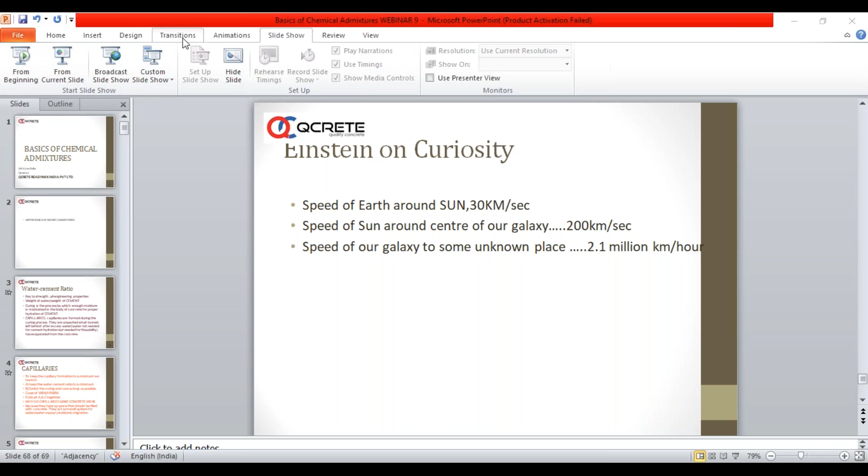Before we start talking about chemical admixtures, we need to know some basics which are very important for any concrete technologist or QA/QC engineer who receives or produces concrete. One of the most important points to remember always in QA/QC of concrete is the importance of water cement ratio. We know that water cement ratio is key to strength and all engineering properties, and the strength of concrete is inversely proportional to water cement ratio, while permeability is directly proportional to water cement ratio.

Most importantly, we need to know that we put extra water, even though we require about 0.27 or 0.22 for cement to undergo hydration. We put about 0.4, 0.35, whatever it is, based on our convenience. This is called water of convenience, and this water goes on evaporating at all temperatures above 4 degrees, and at higher temperatures and higher wind velocity with lesser humidity, the evaporation is greater.

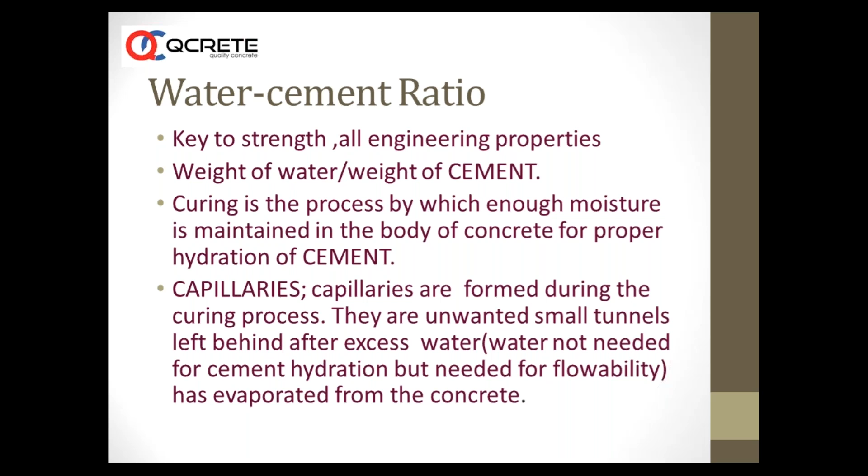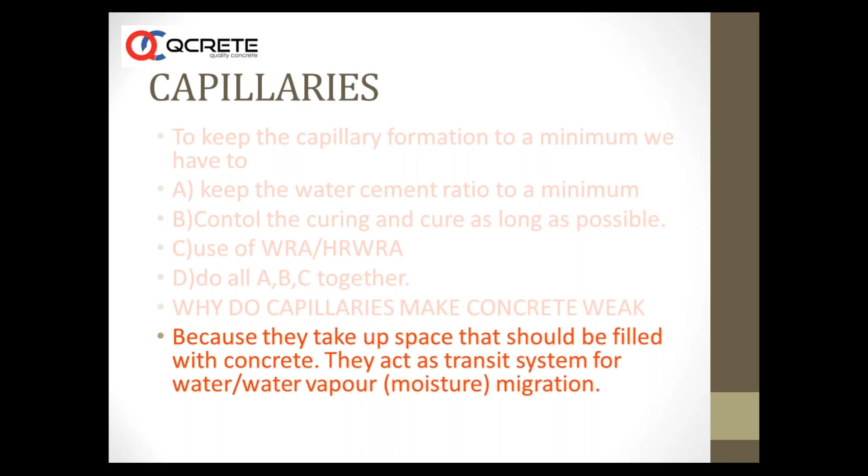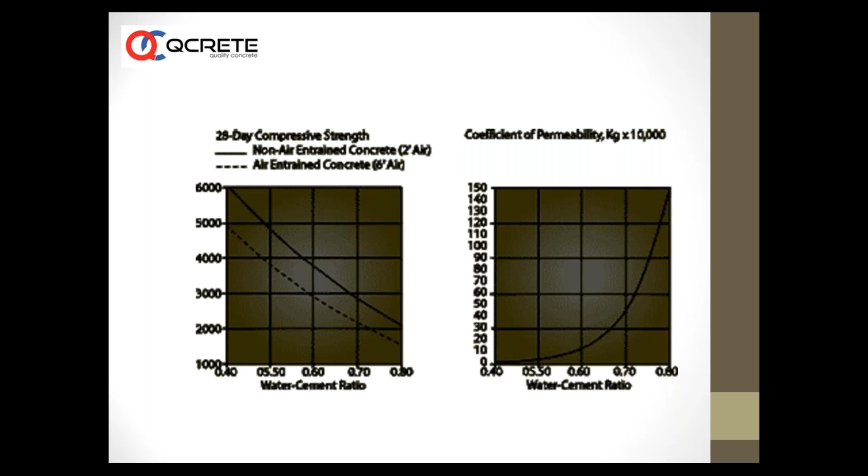Now, can we reduce the water cement ratio directly because we need some optimum cement content? We can reduce the water cement ratio quickly and directly, but it will affect the workability, and you can end up making some low slump concrete or zero slump concrete, or concretes which are useful for paver blocks or concrete blocks or some precast elements, and you cannot produce and transport the concrete, and you cannot have a better shelf life where you can use the concrete for 3 hours, 4 hours, something like that. So there emerges the admixture.

The other point which we need to remember is why we should use optimum cement content. We have already discussed that water cement ratio is the governing factor for strength and durability, and with lower water cement ratios we can get required strengths suitable for our construction, whether it is M20, 25 or M30 or whatever it is. So we can go for reduced cement content mixes with good or reduced water cement ratios to give the required strength.

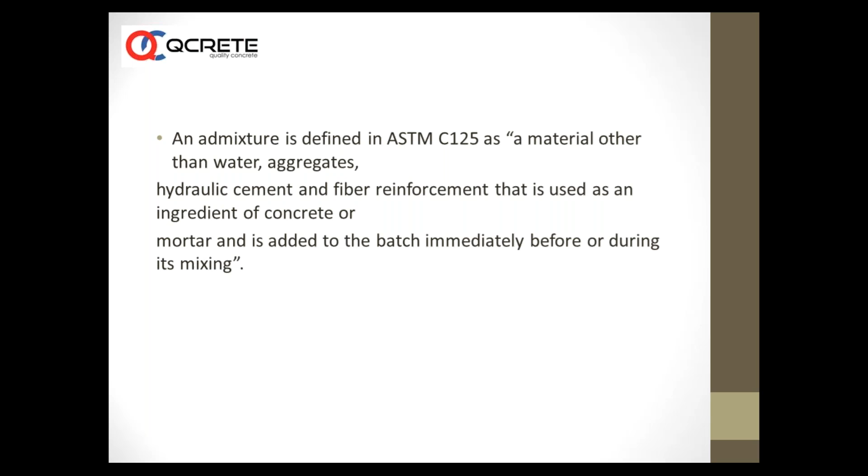There are other definitions also, where we say admixtures can be added up to about 5% by weight of cement in the mix, and that they are other than materials like fly ash, GGBS, microsilica, metakaolin, rice husk ash, and fibers, which do not fall in this category of chemical admixtures.

One of the differences we can talk about with chemical admixtures is that they function in a totally different way compared to mineral admixtures. Mineral admixtures totally change the hydration products, the way hydration happens inside the body of concrete - the hydration products are different when mineral admixtures are used. But chemical admixtures function at the surface level as charge inducers, dispersants, accelerators, or decelerators of the hydration process, and they seldom participate in the actual hydration process.

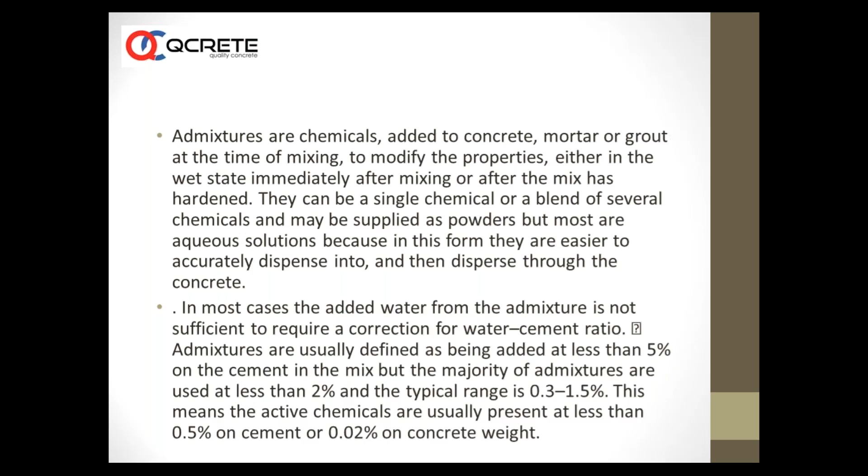Admixtures, including water reducing admixtures, have to completely comply with requirements of slump, water reduction, setting times, compressive strengths, etc., which are specified in IS code 9103. ASTM C494 is also very popular. So in the Indian code, we have some specifications, and the admixture manufacturer has to completely comply with these codes.

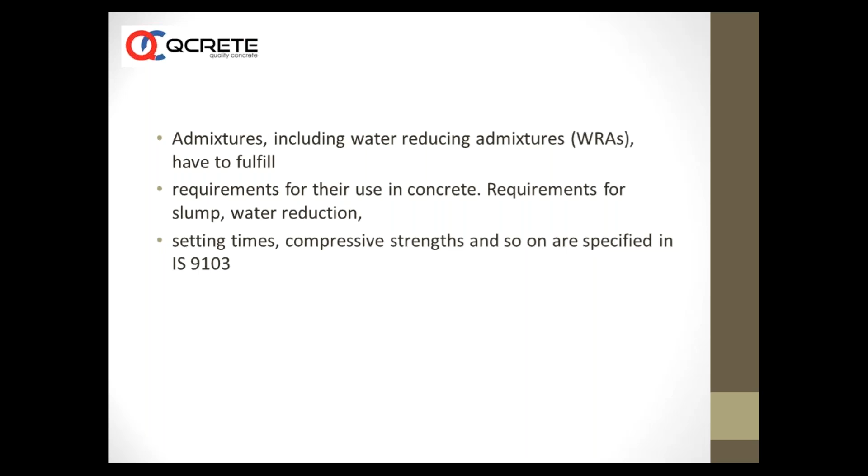Plasticizers and superplasticizers belong to a group of chemical compounds known as dispersants, and their primary function is to reduce water, increase workability, reduce cement, increase strength, and improve durability.

For a producer who is producing the concrete, he can have an optimized mix design. For a contractor who places and finishes the concrete, he will get appropriate workability, compactability, cohesion, proper setting time, and strength development.

A designer also benefits with these materials, getting concrete that will meet special needs for placing and performance. An owner or client gets the design requirements intended for prolonging the service life of the structure, and for everyone in the construction community and humanity, admixtures contribute in terms of sustainable concretes. So admixtures are part and parcel of sustainable concretes.

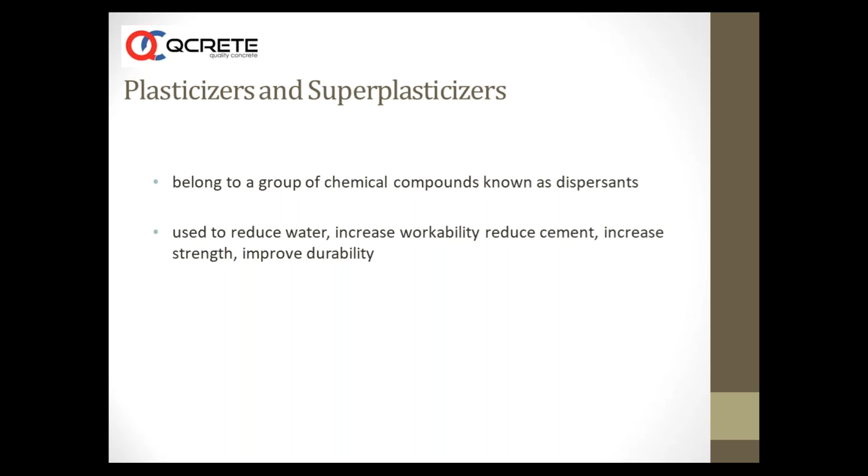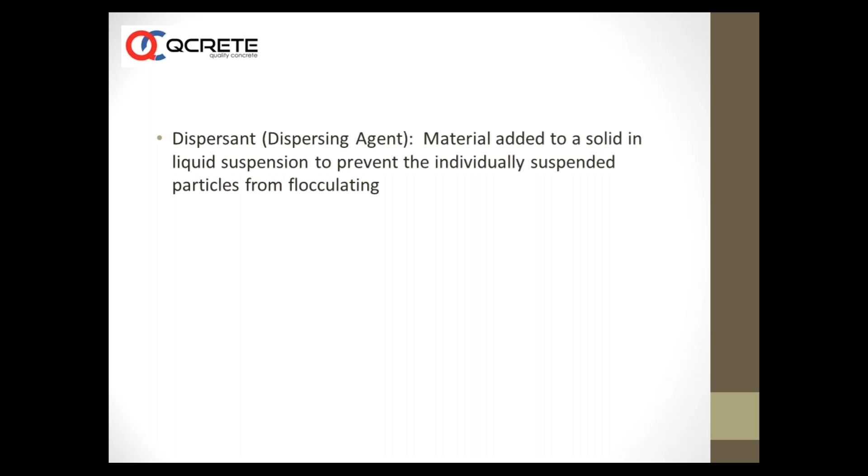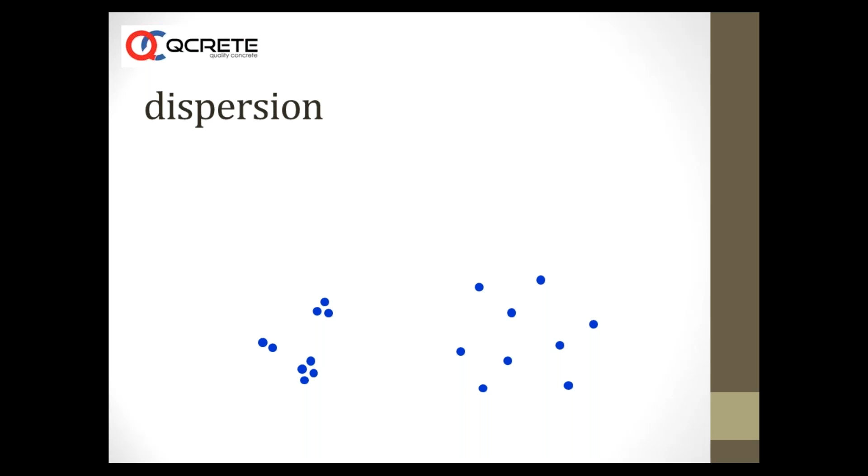So how do they act? Admixtures generally act like dispersants. They do not allow flocculation. For example, what happens when cement particles are there? You add some amount of water. Cement has a tendency to flocculate. The particles come together and they trap water. And this water, which is trapped or entrapped between the cement particles, cannot express itself in terms of giving good workability to the concrete.

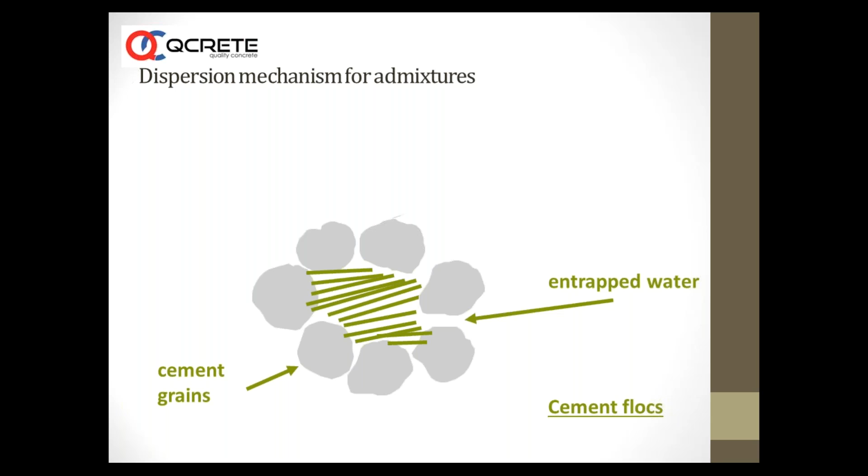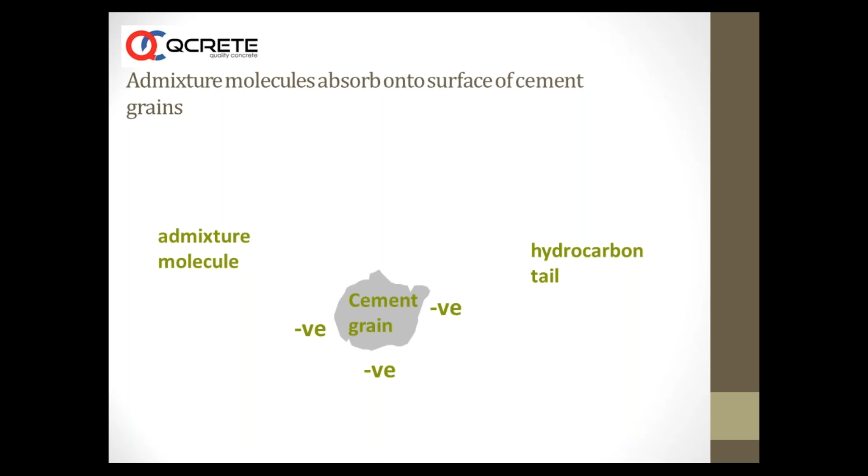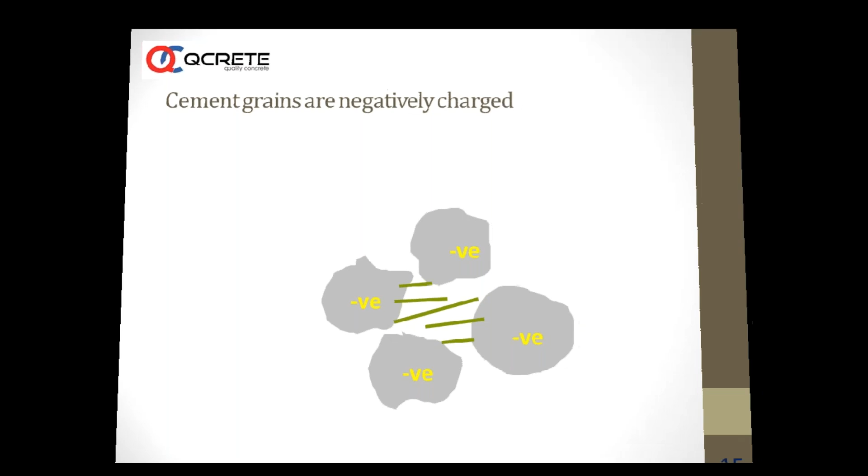This is a basic characteristic of cement actually. It traps the water when you add some amount of water, and hence you will not get the total amount of water already added to express itself as a fluid material. When you add a chemical admixture, it induces and deposits negative charges on the cement particle surface, and when several of these charges are deposited on the cement particles, they become negatively charged with unidirectional alignment. Since the charges are the same, the particles move away from each other, and the water which was erstwhile trapped in the absence of admixture is released.

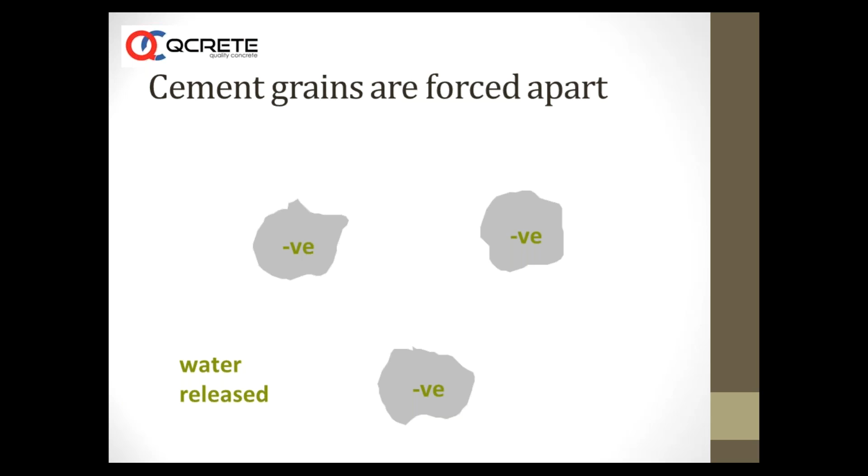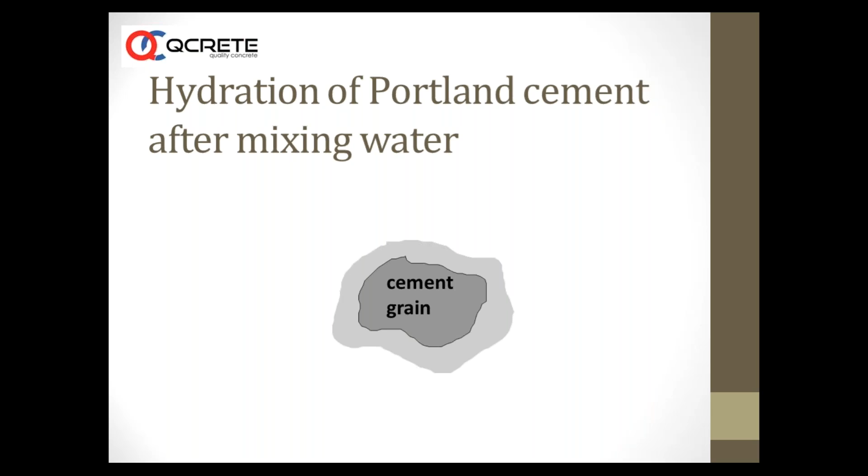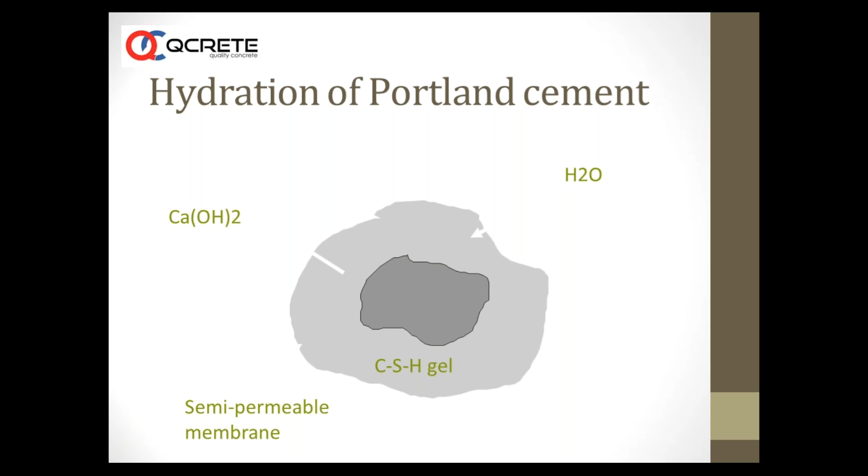So what happens when we add chemical admixture and water? When you add water, cement grain undergoes reaction with water and produces CSH gel and calcium hydroxide, as we discussed earlier. As time passes, the hydration products grow, and because of both physical and chemical action, the charges become weaker and weaker. When the cement particles move over one another during transportation or placing, the charges lose their energy and power, and the cement particles start coming together closer to each other, and normal hydration starts.

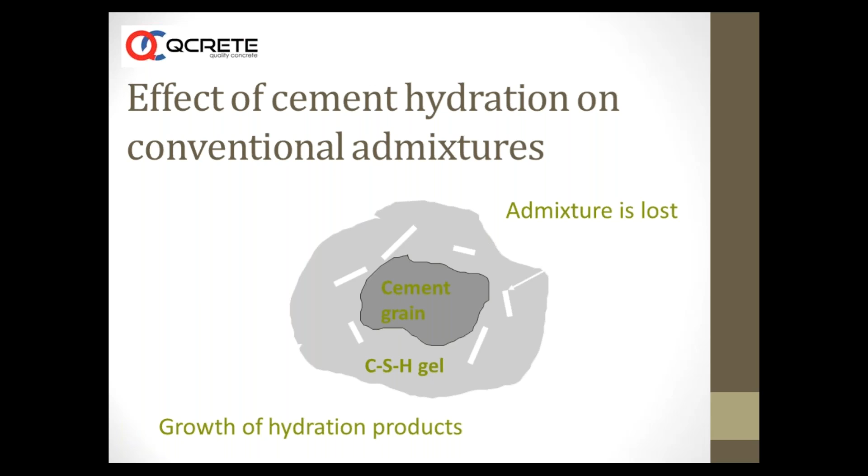There will always be a tug of war going on between one set of forces trying to set the concrete with the aid of C3A, while the other set of charges deposited by superplasticizer or plasticizer are trying to move the cement particles away from each other. So as time lapses, the cement particles start coming closer to each other, and the hydration starts as normal as it should have been in the absence of chemical admixtures.

So chemical admixtures are not new, they have been there for quite a long time. Earlier, we always remember what the Romans were doing, because in whatever way we see, the historians have not been able to go beyond what the Romans were doing. Even concrete technologists or scientists are not able to record or document what was happening much before the Romans. Even though we have structures beyond 5,000 or 10,000 years old, like the pyramids, we have not recorded or documented usage of mortars beyond that period. So Romans come first. Romans were using blood, straw, and urine in the mortars, along with volcanic ash, to make strong mortar.

In early 1935, plasticizers like lignin-based and naphthalene formaldehyde-based superplasticizers came into existence with limited water reduction. Around the same time, one of the first patents was done on SNF, sulfonated naphthalene formaldehyde-based admixture. The next step was in 1945, where air entraining admixtures came into being. That is said to be one of the biggest changes in the history of concrete, which boosted concrete practices significantly and changed concrete practices forever.

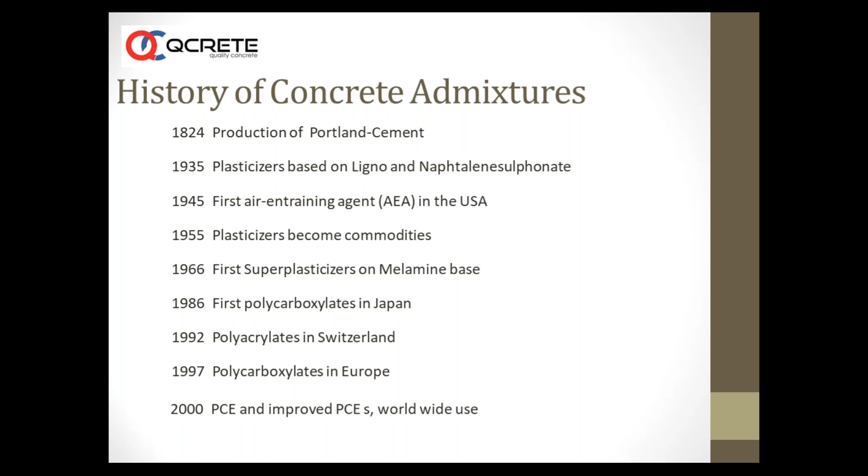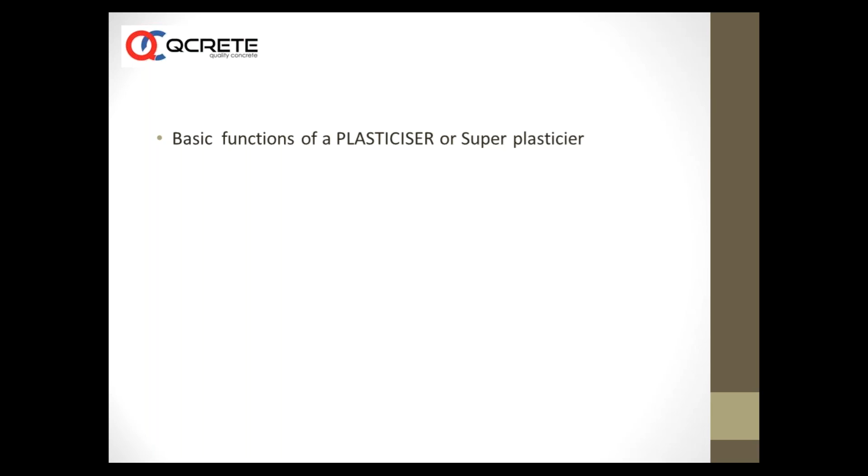We need to know what are the basic functions of a plasticizer before we move on to the benefits and things like that.

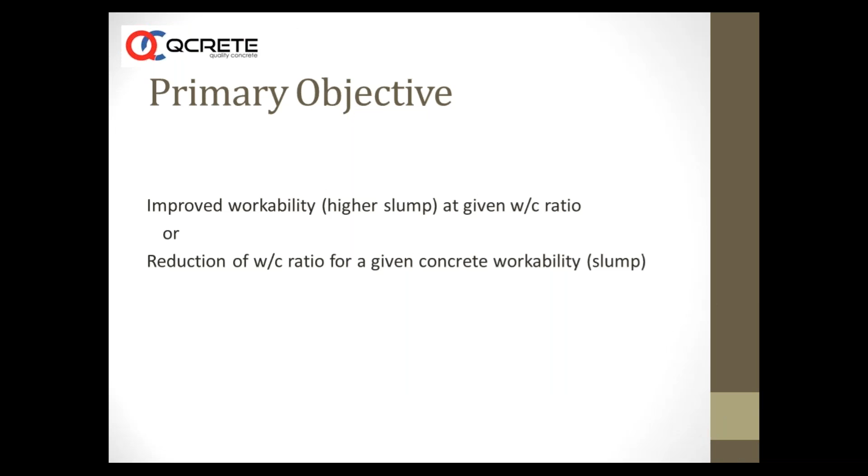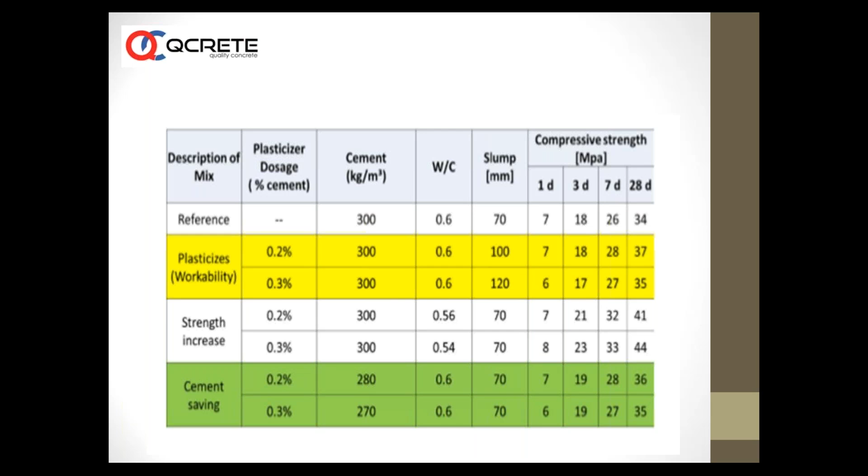So in short, let's say the workability is A, strength is B for a mix. If you are adding admixture and reducing the water, you will get similar workability and increased strength.

Second case: the admixture is added, we reduce the water, and we can reduce some amount of cement. Then you can get workability similar to the reference concrete, and the strength can be similar. This is where you get the cement savings.

Third is where you just add the admixture. Here you want a flowable, fluid concrete. You are not bothered about economy or increasing strength, just making the concrete flow better, fill your molds faster and quicker. So here you get increased workability and similar strength.

So the entire use of chemical admixtures, which any concrete producer nowadays is using, is based on these three principles: either we can increase the strength, or we can save the cement, or we can increase workability, or we can do combinations of these things.

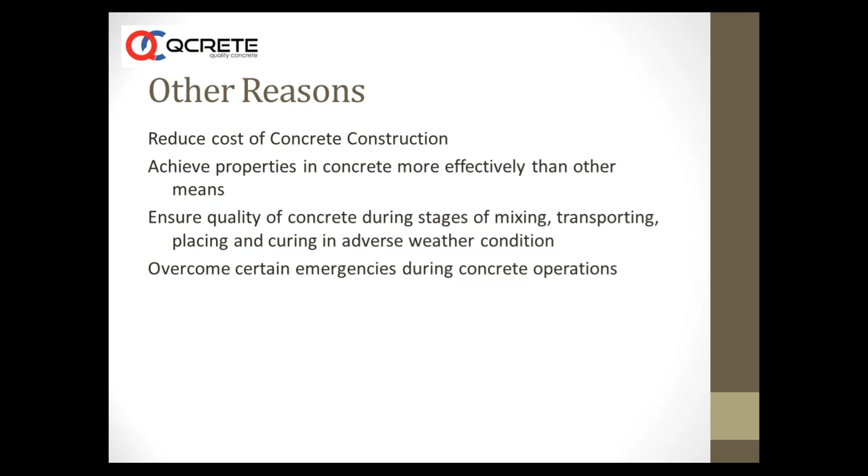Other reasons: reduce cost of construction, achieve properties in concrete more effectively, ensure quality of concrete during stages of mixing, transporting, placing, during adverse weather conditions, and overcome certain emergencies during concrete operations. These are some of the other reasons why we have to use chemical admixtures.

A description of different kinds of admixtures is given in ASTM C-494. Type A is water reducing admixture, which is a simple plasticizer. A plasticizer which gives a water reduction of about 5 to 12% with a dosage of about 0.3 to 0.8%.

So here the main function is that the chemical admixture will reduce some amount of water, and it can be used, as we told earlier, to either increase the fluidity, increase the strength, or do some cement saving. This is just a water reducing admixture. It will not have any other properties.

The next category is retarding admixture. A retarding admixture is a pure retarder which affects the setting time of concrete. It prolongs the setting time of concrete, and allows the concrete to be transported and placed for a longer time.

But type B admixture doesn't have water reducing ability. It doesn't reduce the water content in the mix.

Similarly, the opposite of this is accelerating admixture, which reduces the setting time of concrete and makes the concrete set faster.

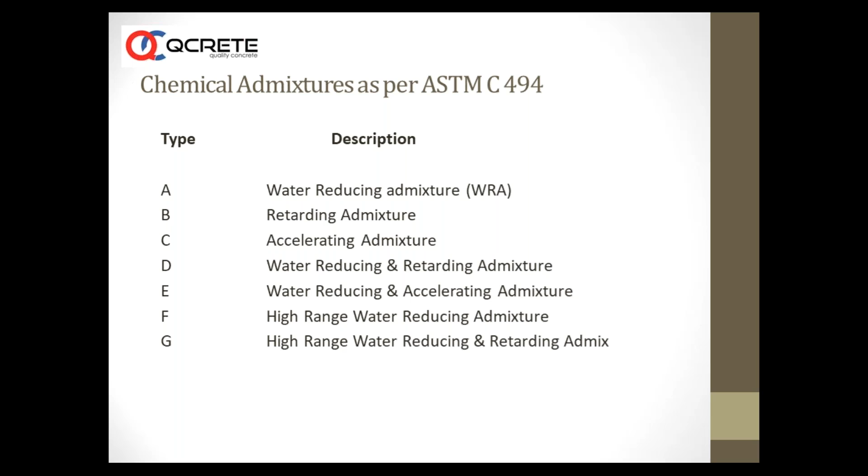The performance of water reducing admixtures based on their basis: lignosulfonates and modified lignosulfonates are up to 10%, melamine sulfonates up to 25% water reduction, naphthalene sulfonates 25%, and the highest has been PCE based admixtures, up to 40%.

So when we have graduated from lignosulfonates to the latest generation of PCE based admixtures, now high strength concrete, SCC, all have become child's play.

Earlier in 1990s, we used to go to the market to convince the customer why he should use chemical admixture, and is there any real benefit in terms of economy? Can he do away with the chemical admixture? Can we use cement alone? We were trying to convince him about the long-term benefits, telling him there were no side effects by using chemical admixtures - there is a history we used to tell in the 1990s when we were trying to promote chemical admixtures.

But now it has become almost a commodity, and concrete technologists have started writing numbers like 400 kg, 420 kg cement content, M40 concrete, water cement ratio 0.35, 0.34, 0.6, whatever comes to their mind, they can write and do the mix design, going to the extent of reducing the water cement ratio up to 0.23, 0.24, thanks to PCE based admixtures.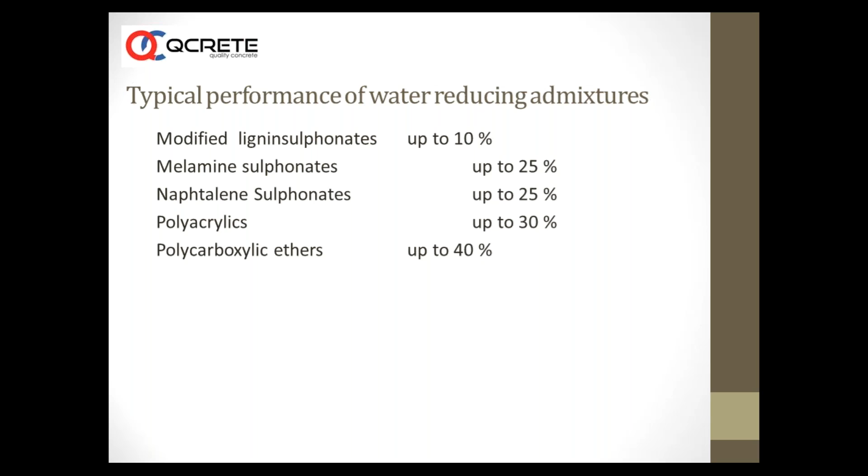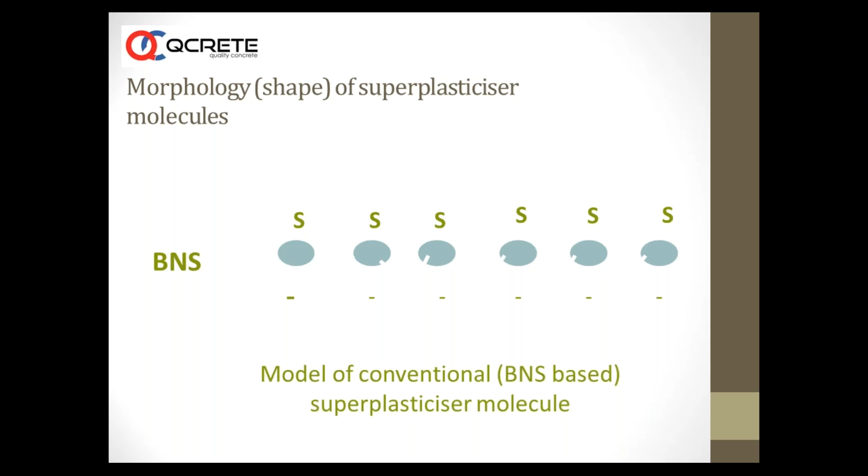Now, the superplasticizers based on conventional beta naphthalene sulfonate superplasticizer molecule has negative charges. We have sulfonated naphthalene formaldehyde, sulfonated melamine formaldehyde, which was very popular in 1990s until 2000 in India.

It slowly faded off because the slump retention was an issue - it was difficult with this kind of admixture, and the usage has now been restricted to some precast units or tile manufacturing. SMF manufacturing also started becoming costlier, so it has taken a back seat.

Similarly, lignosulfonates were very, very popular. There are products which are type D, ASTM C494 type of admixture, plasticizer cum retarder, which was very, very popular throughout India. And lignosulfonate based admixtures also took a back seat in India.

Because we found that lignosulfonate based admixtures are very, very sensitive to changes in cement properties, and any inconsistencies especially when the cement content goes up beyond 400 kgs. On part of the lignosulfonate based admixtures, there used to be set retardation, or there used to be a kind of air entrainment or things like that. Slowly this has gone out of the market almost entirely.

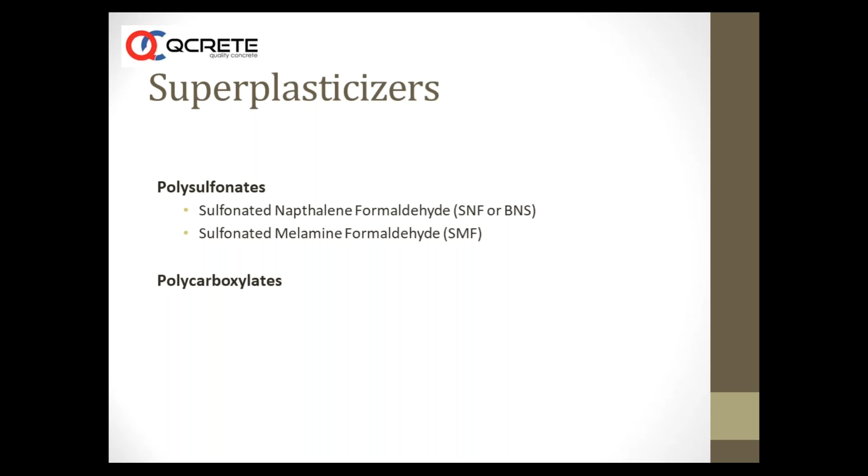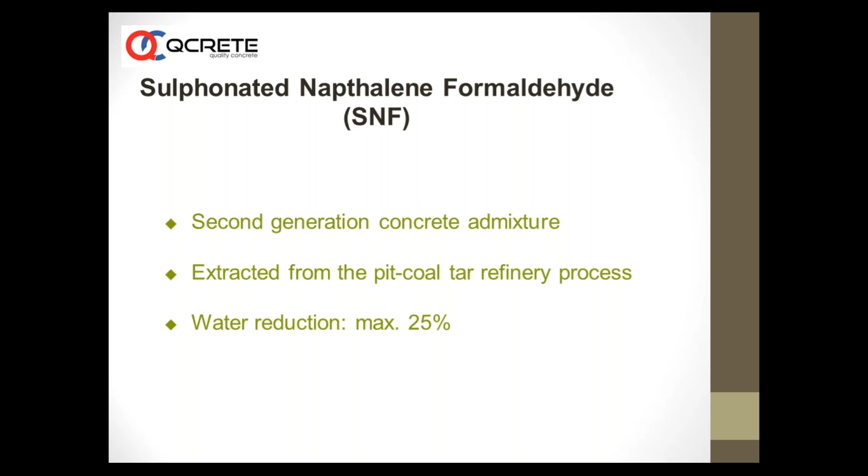SNF, second generation concrete admixture, extracted from pit coal tar refinery process, water reduction maximum about 25%, and their chemistry. We do not go deep into this chemistry. We are interested in application of these products.

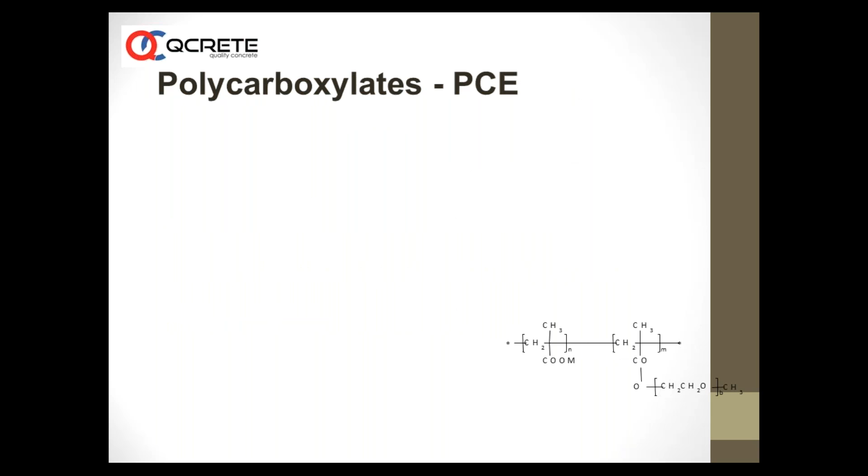PCE based admixtures, as we told earlier, there is a huge shift in the way concrete is done thanks to this kind of materials, because water reduction is highest, up to 40%. There are so many formulations, so many ways PCE based technologies have moved with a lot of research, where the admixtures have gone to different levels, making different kinds of concretes, including SCC.

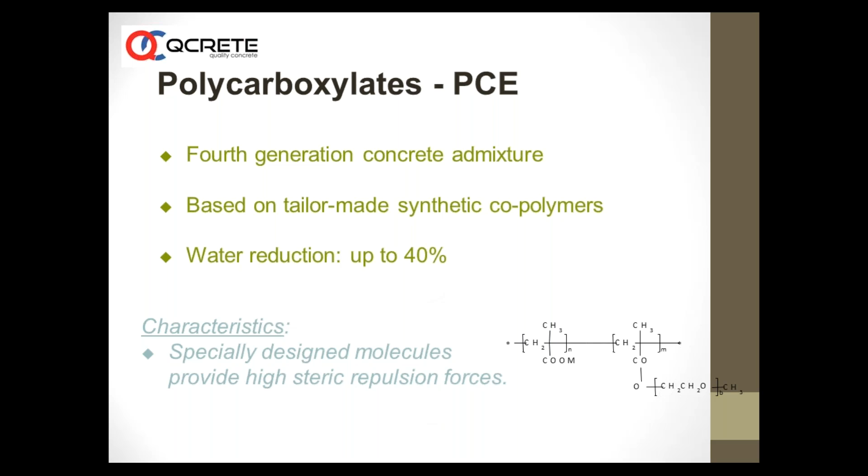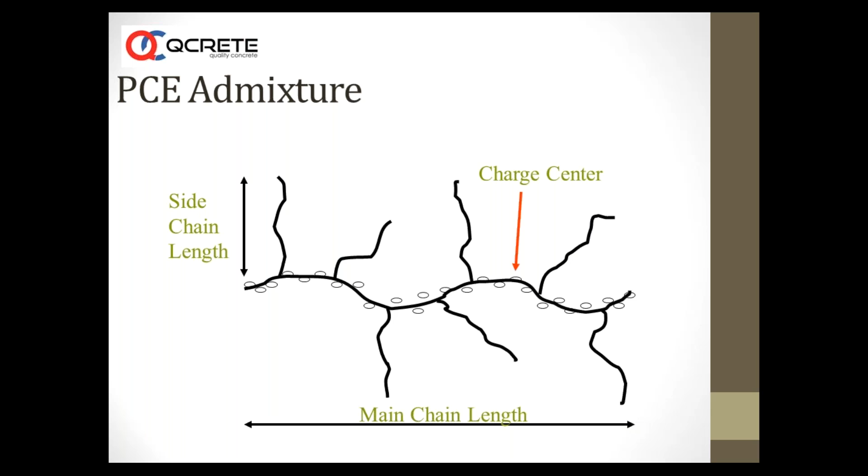Now, PCE-based admixtures, unlike SNF and other admixtures, operate on main chain length and side chain length, where both deposit negative charges, and the total amount of charges and repulsive forces or steric hindrance is manipulated by the chemical admixture manufacturer by changing the concentration, changing the molecules, tweaking the molecules. Use of nanotechnology has also influenced the progress of these admixtures.

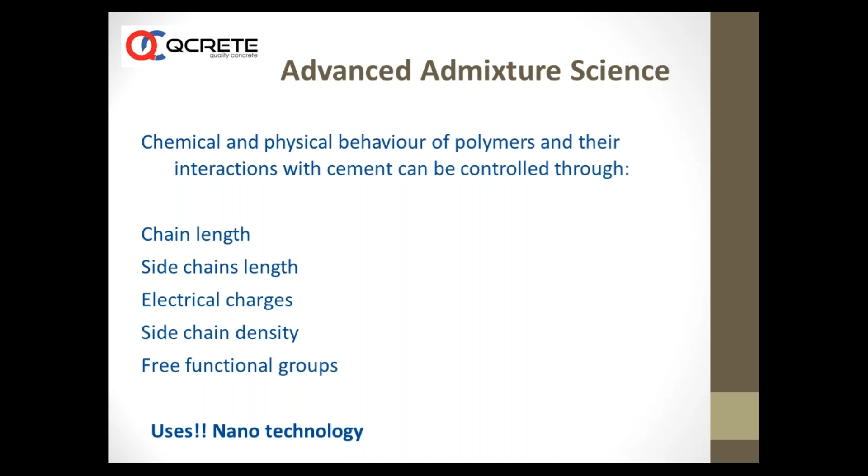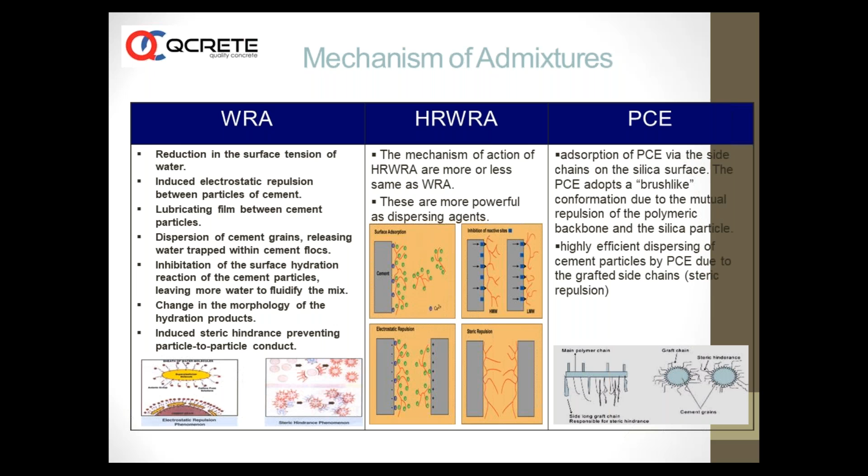Now the mechanisms, in short, are almost similar, but PC admixture operates on steric hindrance, where at a molecular level the deposits of chemical charges give tremendous repulsion, and there is suspension. These cement particles are suspended for longer time, and you get high plasticity, high fluidity, longer retention times. Mixes like SCC are possible using PC based admixture.

Another picture of the same. Now, one of the biggest changes that took place before the advent of PC based admixture was the invention of air entraining admixture.

We need to know what is the difference between air entrainment and air entrapment. Air entrainment is chemically produced air when concrete is made with some chemical admixtures called air entrainers. Entrapment is whenever we are mixing concrete, some air is trapped physically. These are called air entrapment.

The difference between these two is: in air entrainment, the air bubbles are smaller, very small, largest maybe 1 mm or just below, and it can go up to 0.3 or 0.2 mm in diameter. Whereas air entrapment, which is a physical action of trapping some amount of air during concrete mixing, here the entrapped air bubbles are bigger in diameter, irregular, spread non-uniformly across the body of concrete. Whereas with air entrainment, the air bubbles are seen uniformly spread in the body of concrete.

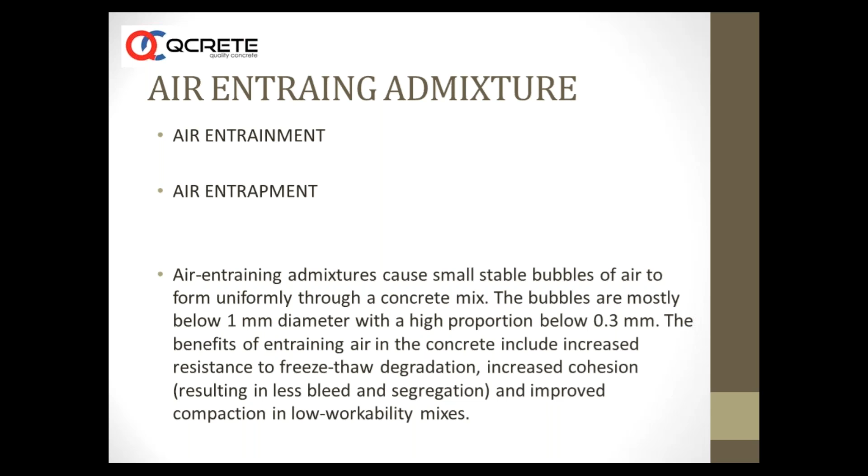You can see the uniform spreading of air bubbles in the body of concrete, and you can see this even after say 20 or 30 years. If you cut a core of the concrete, you can see air bubbles after 20 or 30 years. Some amount of air will be lost during transportation. Entrained air will be lost during transportation or placement, during compaction.

So what is the use of this? The use of air entrainment is that its biggest contribution is resistance to freeze-thaw.

When these air bubbles are introduced uniformly in the body of concrete by usage of air entrainers, air entraining admixtures, some of which are natural wood resins, some are chemical based like SLES, and others are fatty acids or vegetable oils or combinations of these materials.

When they produce these air bubbles and sit in the body of concrete, and when the water freezes, the volume of water increases. When the water increases in volume during winter in cold weather conditions, for example in countries like Europe, the increased volume is accommodated by air bubbles, which shrink in volume and accommodate the increased volume of the frozen water, wherever it is in the body of concrete.

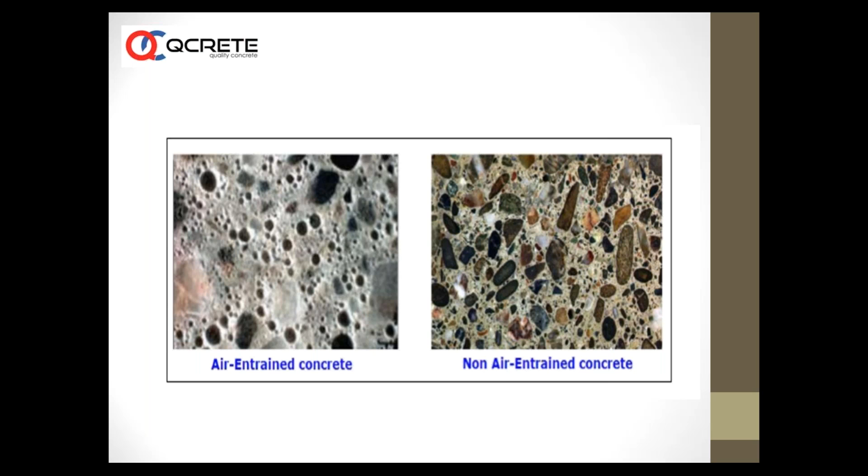So we have other admixtures like waterproofing admixtures. We already talked about waterproofing admixture. The base of a popular commercially produced waterproofing admixture is lignosulfonate based admixture along with air entraining admixture.

Then mortar plasticizer also has some amount of air in it actually. The mortar plasticizer should give two properties as we discussed already: water retentivity and water reduction, and then some amount of air. These three are important. Also a mortar plasticizer should give some amount of retardation, to increase the shelf life of the mortar or plaster.

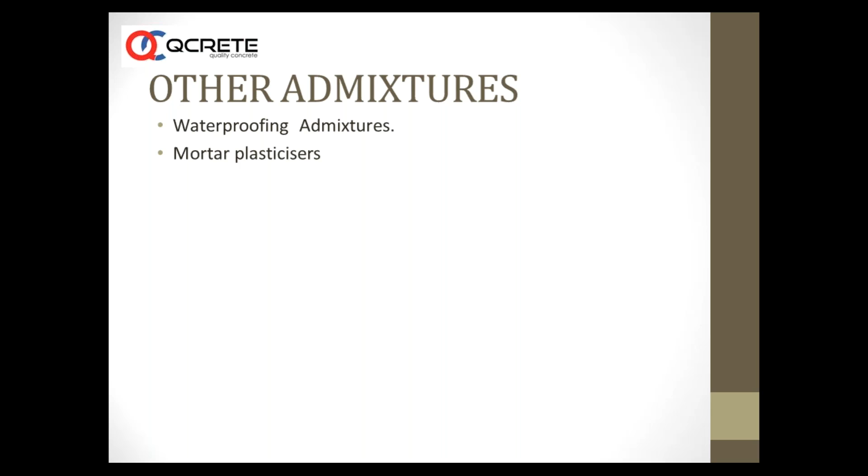Other admixtures, you have coloring admixtures, various kinds of iron oxides and things like that are used to give different colors. Then we talk about corrosion inhibitors. Corrosion inhibitors are nowadays becoming very popular as the performance of concrete mixes is becoming the primary criteria and not the strength actually.

When oxygen enters into RCC structure along with water, it attacks the reinforcement bar, and the reinforcement grows in size after corrosion up to 6 times its original volume. So the corrosion leads to cracks in the body of concrete, deterioration of concrete, spalling, and it pushes the concrete to a point where the structures have to be demolished, or they fall off on their own.

So you have corrosion inhibitors. Some of the corrosion inhibitors are inorganic or organic in nature. They can be mixed along with the concrete or they can be surface applied. Some of the materials which are very popular are calcium nitrite. They have been used from the 1950s or 1960s and have a good history of about 30-40 years.

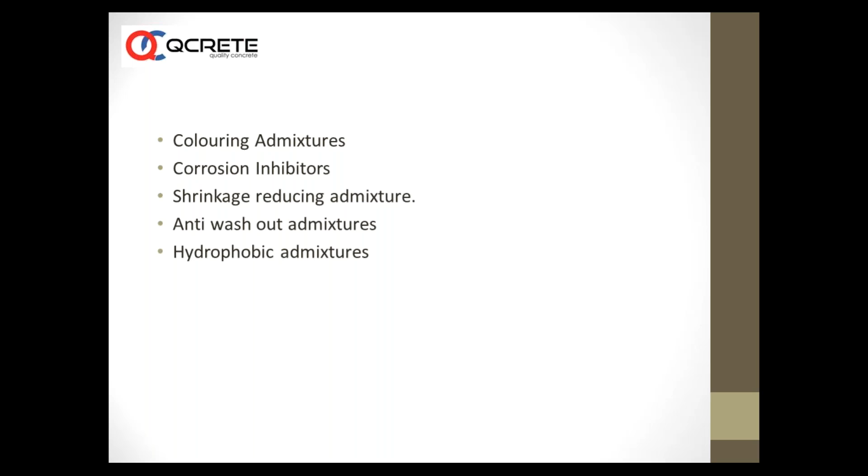Then you have surface retarding admixtures, used when you need to produce architecturally or aesthetically pleasing concrete. You take this set retarding admixture and coat it on the form liner or formwork. Concrete is placed, and the next day when you remove the formwork, the surface retarding admixture reacts with the surface cement particles, removing them, and you get what is called exposed aggregate surfaces.

You have foam producing admixtures, some protein based, or various combinations exist. Some proprietary mixes produce and generate foam, and using a foam gun or similar instrument, air is pushed along with the foam generated through this chemical action into cement mortar or concrete. This gives low density concretes which can be used as a non-structural fill.

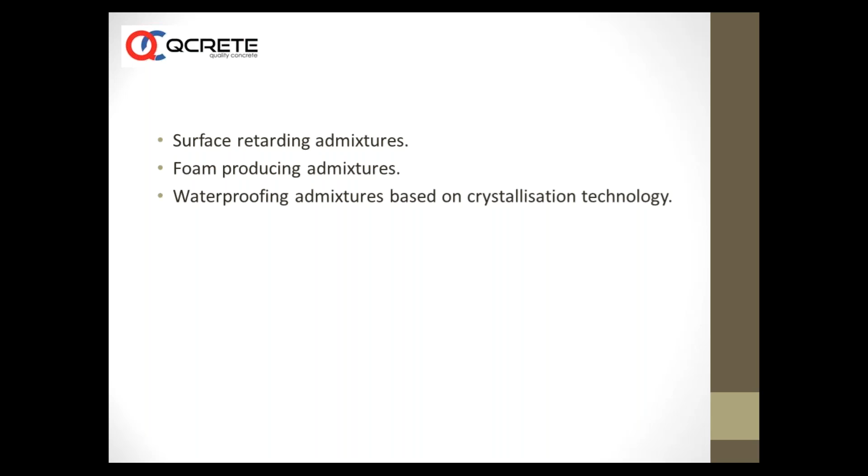These hydration products, which grow as crystals, occupy the capillary pores and make the concrete more and more impermeable. This has become very, very popular. Both materials, one used pre-construction along with concrete production as an admixture, and the other used post-construction as a slurry or coating applied on top of virgin concrete, have become very popular.

The manufacturers say the activation is continuous. The material penetrates up to about 50mm or 100mm and goes on reacting with the cement hydration products. As long as hydration continues, which can go on for 30-40 years as long as some moisture is there, this crystallization also continues, and hence the impermeability goes on improving.

Recently there was a person from Mumbai who asked one question: can you guarantee the concrete after 18 months? What happens to your concrete after 18 months? What is the reaction after 18 months or something like that?

Be rest assured, with the use of these materials along with the cementitious materials, the strength and properties go on increasing as the concrete ages. This crystallization continues for longer and longer, as long as some unhydrated cement particles are there, as long as some moisture is there, as long as some calcium hydroxide is there, this process and growth of crystals will continue. They pack the capillary pores and density increases, impermeability increases.

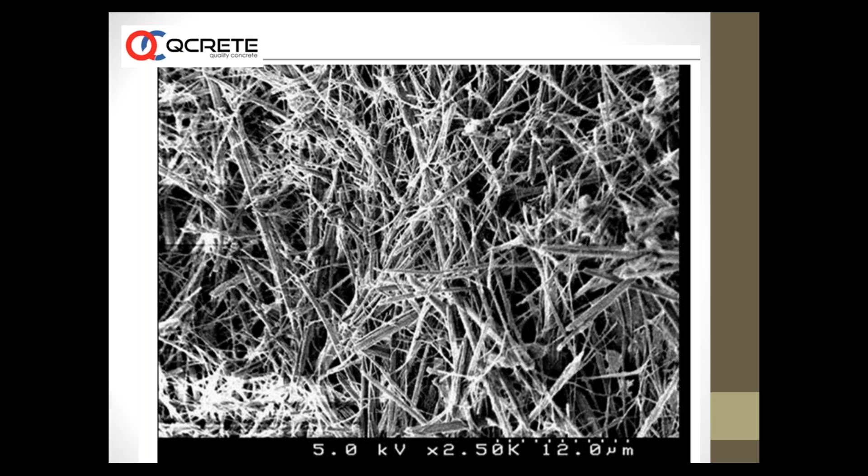Then we have admixtures to help the self-compacting concrete makers. As this self-compacting concrete came into the market, we have another problem where using a PC based admixture to make self-compacting concrete, many times bleeding and segregation happens.

To counter this, we have viscosity modifying admixtures. Some are based on xanthan gum and similar materials. There are various versions added at very low dosages, like 0.01% by weight of cement.

This holds the concrete together in a viscous state. It will not allow concrete to bleed. It will allow it to flow in a very systematic way, and no segregation will be found.

So such admixtures are being used either separately, or now some companies are blending them together with PC admixtures, using it as an inbuilt two-in-one admixture: one is a PC based type G admixture, blended with some amount of VMA.

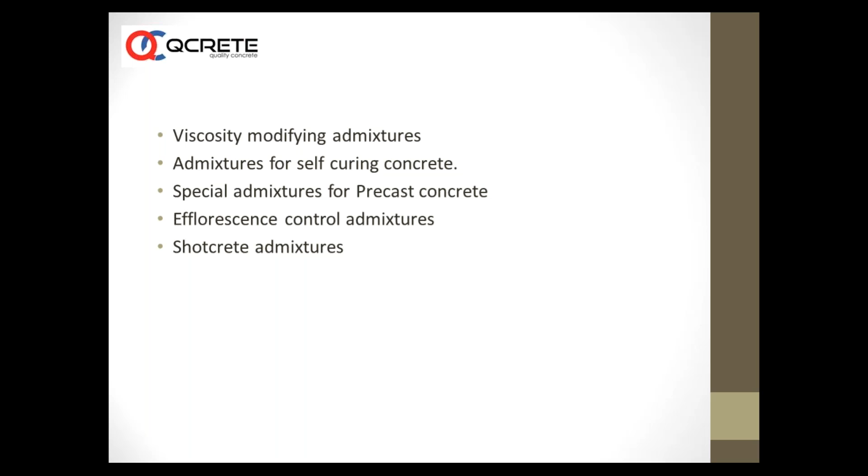You have other kinds of admixtures too - efflorescence control admixtures, shotcrete admixtures - and hydration control admixtures are also becoming popular.

As we said earlier, hydration is a continuous process. Hydration goes on as water keeps reacting, and it is said that for water to reach the core of a cement particle, it may take 30-40 years.

So there comes the usage of hydration control admixtures, where in the initial stages temperature control takes place - temperature is not raised - and as the age increases, it accelerates the hydration process, maximizing it so the concrete reaches the highest potential strength it is designed for.

This is very useful in high cement content mixes and low water-cement ratio mixes, where some cement particles sit unhydrated for a long time due to various reasons.

One reason can be a very low amount of water, which may have evaporated. In such cases, hydration control admixtures will not allow water to escape. They control the rate of hydration so it continues continuously, and also act like a catalyst to change the hydration process, accelerating it over time.

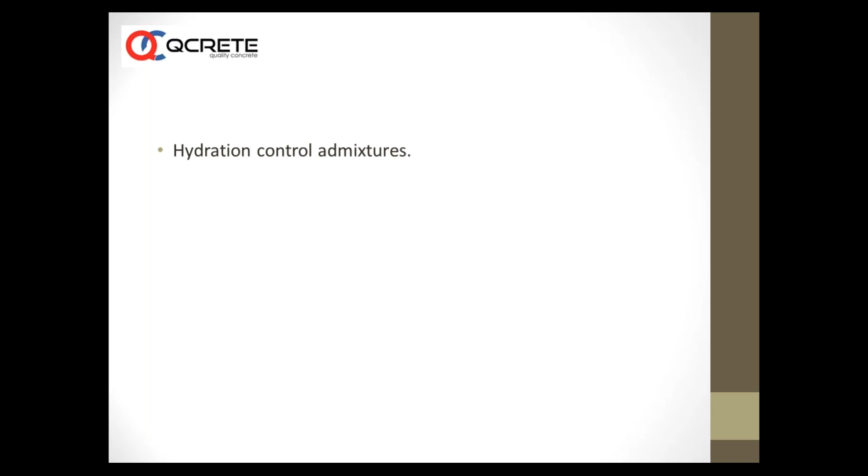Now, the crystalline admixtures, which we talked about earlier, also have the ability to heal the concrete. Whenever a crack takes place, the crystals grow. So most crystalline admixture manufacturers also claim to have the self-healing or healing properties of concrete.

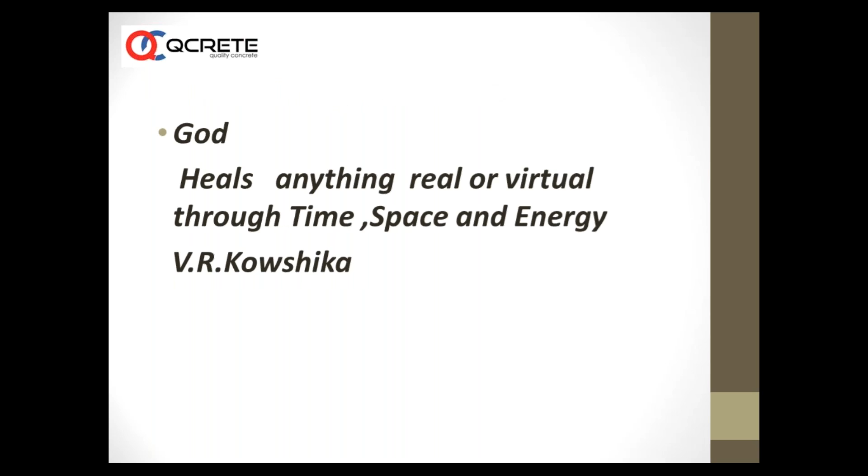The crack bridging ability of concrete works when the cracks are very small. Now what we are speaking about is bioconcrete, where we are talking about two major types of cracks: cracks in plastic state and cracks in hardened state. Both cracks cause problems if left unattended, affecting directly the durability of concrete.

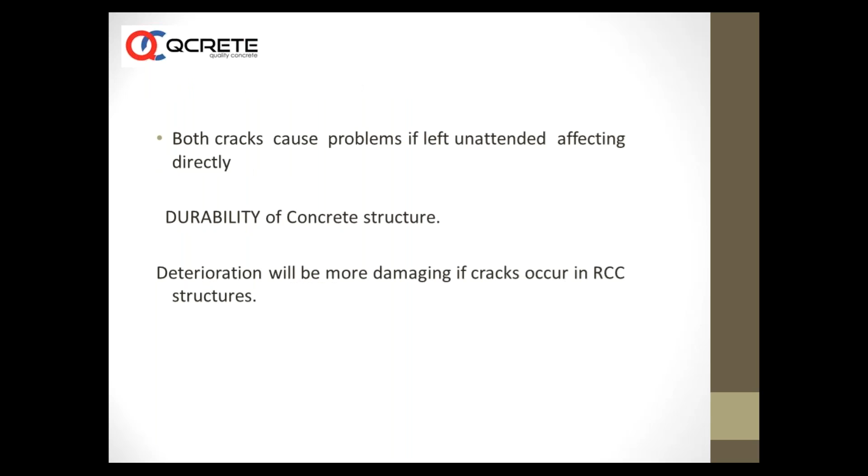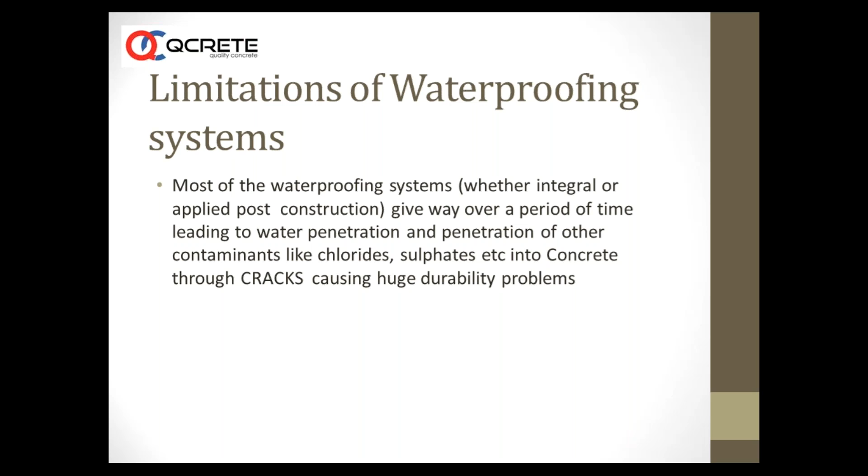You have a lot of waterproofing systems, and these waterproofing systems give way over a period of time, leading to water penetration and penetration of other contaminants like chloride, sulfates, etc. into the concrete through cracks, causing huge durability problems.

No matter whatever you do, the cracks can lead to collapse. Cracks will open up eventually. It is almost impossible today to ensure 100% crack-free concrete, and it costs a lot. If you want to do such kind of concrete, it costs a lot at this moment.

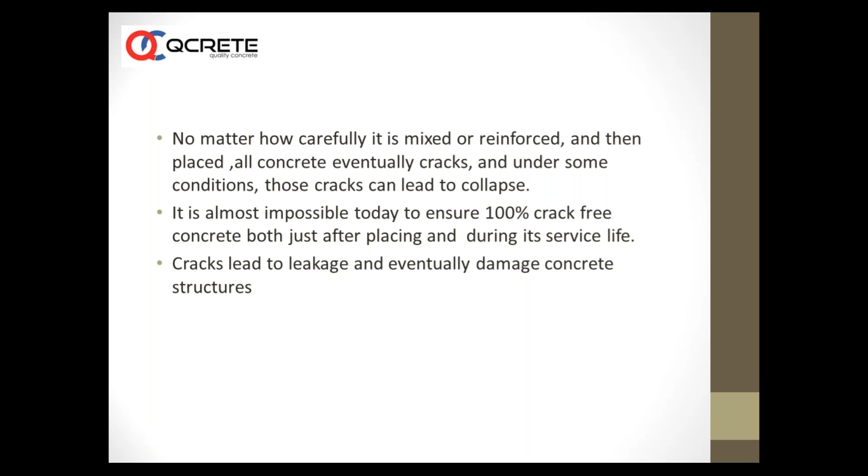You need to use shrinkage compensating admixture. You need to use a lot of fibers. You need to reduce the water cement ratio. You need to do all sorts of tricks to achieve crack-free concrete, along with a very good proper method of curing. In spite of all that, many times cracks can happen, which can eventually damage concrete structures.

So all concrete structures, especially reinforced concretes, have to survive the test of time against weathering agents, and need to be crack-free and made impermeable.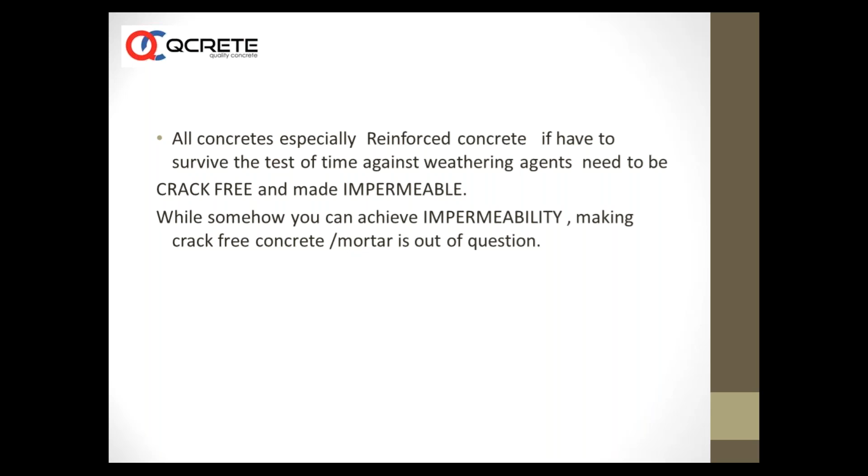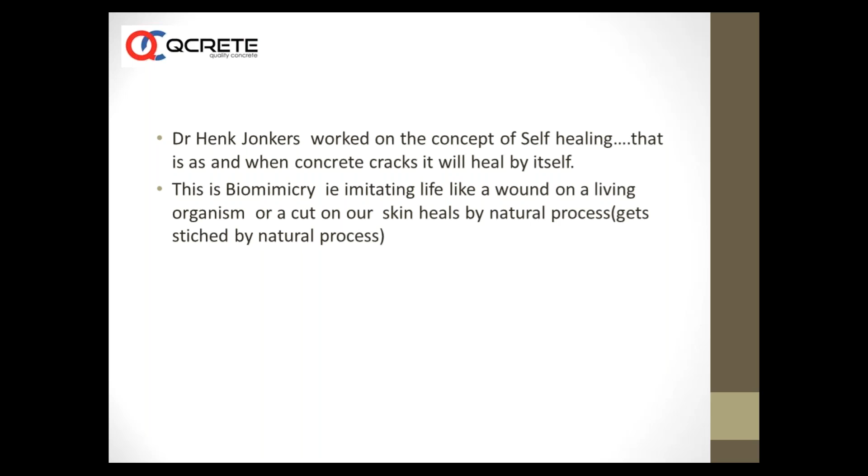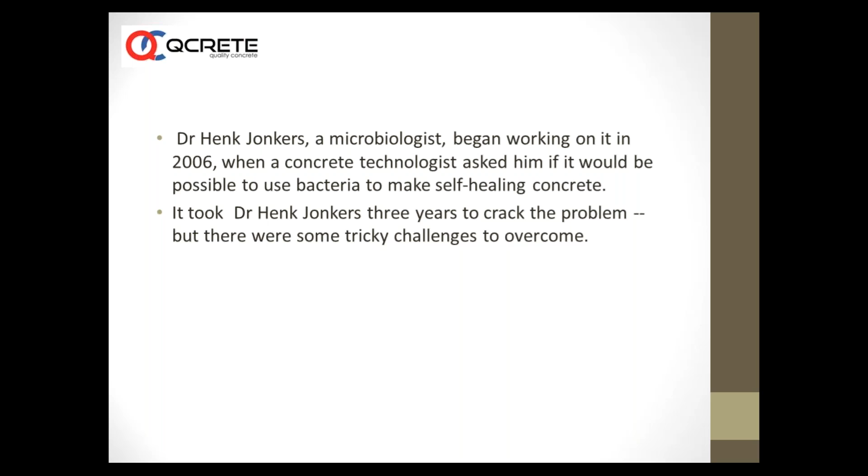He said you need bacteria that can survive the harsh environment of concrete, and concrete is very extremely alkaline. Healing bacteria must wait dormant for years before being activated by water.

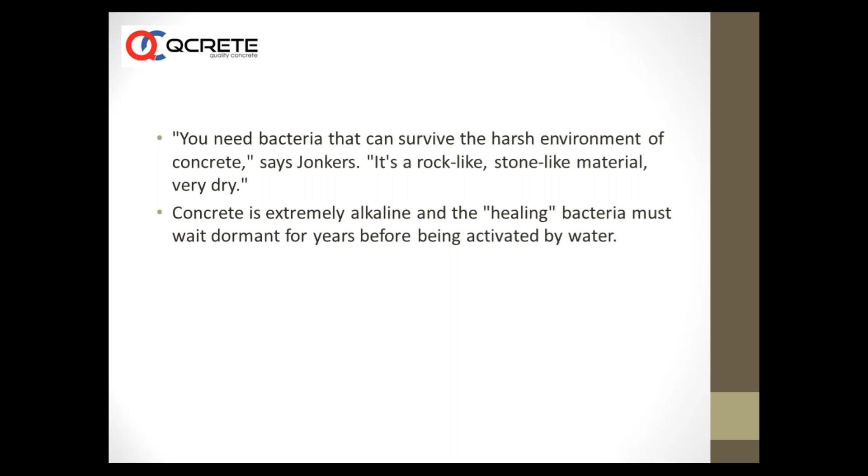So the technology is, you have some bacteria, it gets encapsulated in some capsules, you add it as an admixture along with the concrete while you are making concrete. Then whenever the crack opens, when oxygen enters and water enters, it reacts, breaks this encapsulation, reacts with the bacteria, and the precipitation of calcium carbonate and calcium silicate takes place, and these cracks get healed. So that is the principle.

The bioconcrete is mixed just like regular concrete, but with an extra ingredient, the healing agent. It remains intact during mixing, only dissolving and becoming active if the concrete cracks and water gets in.

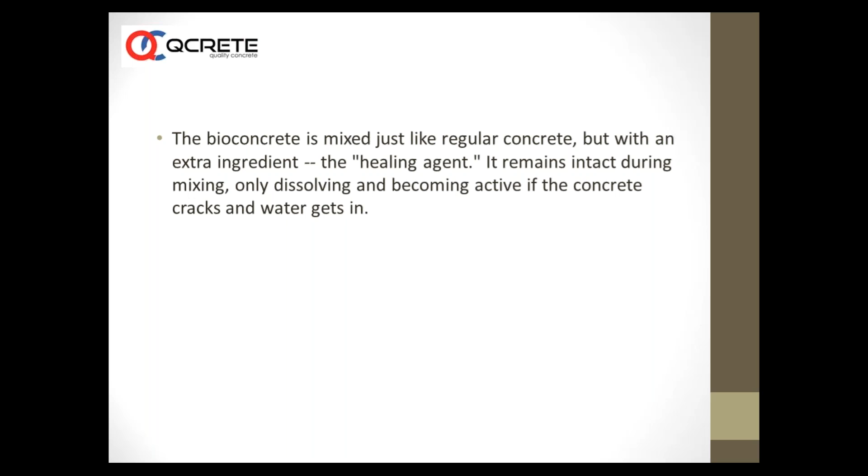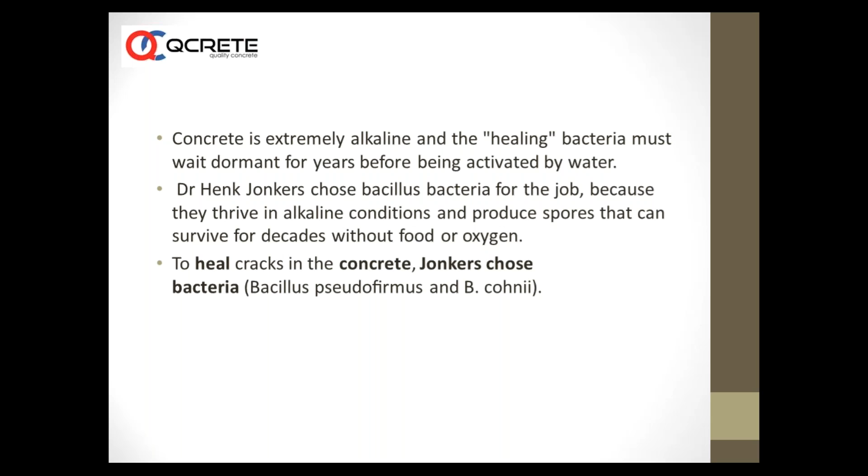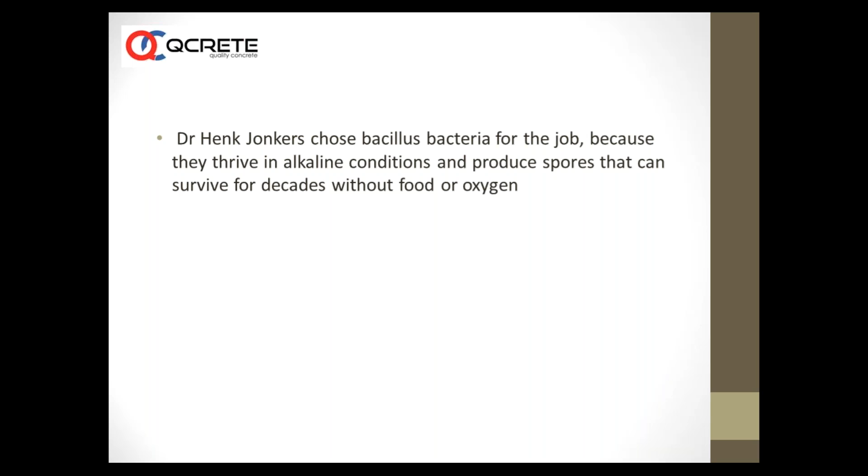So for this, Dr. Henk Jonkers chose a bacteria called Bacillus pseudofirmus, which thrives in alkaline conditions and produces spores that can survive for decades without food and oxygen.

So the next challenge was how to have the bacteria active in concrete, but also make them produce repair material for concrete, like limestone. In order to produce limestone, the bacilli need a food source, which is sugar, as one option. But if you add sugar, it acts as a retarder.

In the end, Jonkers used calcium lactate, setting the bacteria and calcium lactate into capsules made from biodegradable plastic, and adding the capsules to the wet concrete mix.

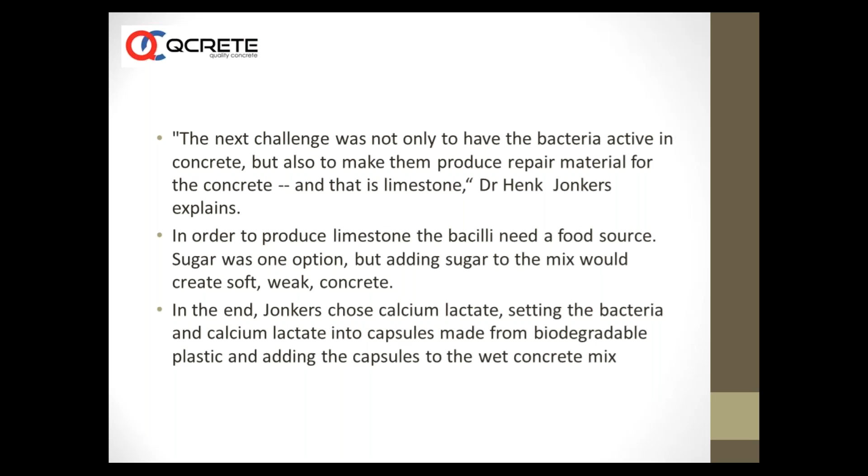When cracks eventually begin to form in the concrete, water enters and opens the capsules. The bacteria then germinate, multiply, and feed on the lactate. In doing so, they combine calcium with carbonate ions to form calcite or limestone, which closes up the cracks. So calcite or limestone is formed and it fills up the cracks.

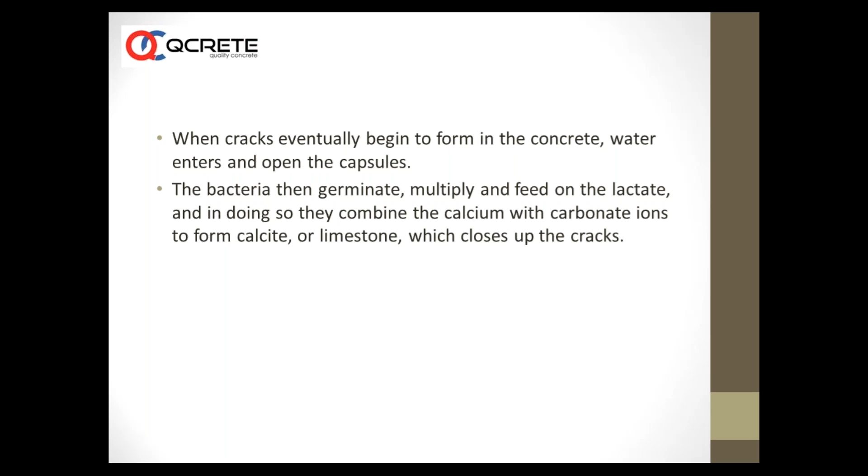So it is said to have an effect of almost 200 years. The spores can live for a long time. As I said, it is tested through accelerated tests to live for about 200 years.

So in important public structures like flyovers, bridges, metro, water storage tanks, nuclear power plants, and defense infrastructure buildings, where durability is of number one importance, you can have this kind of material.

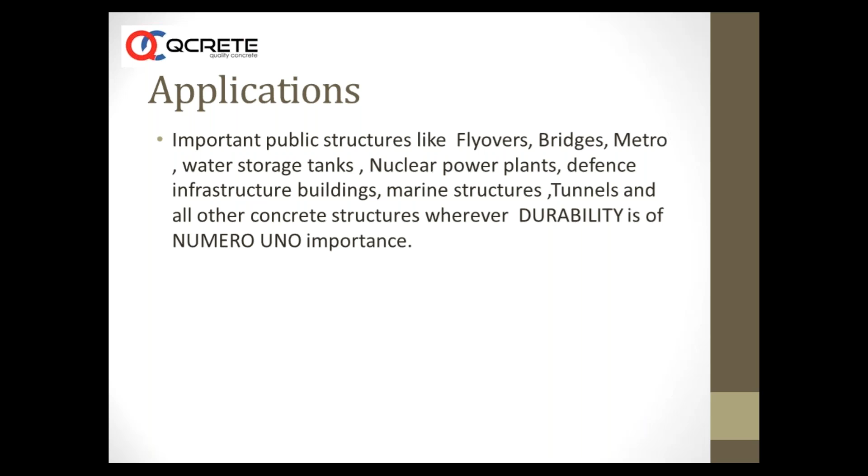At this moment, the product is costly and commercial applications are not too many, except in some parts of Europe and Netherlands. So it is, you can say, in its infancy.

Similarly, on admixtures, we have spoken so much and talked about the benefits of admixtures so far. But whenever small problems happen, we start talking badly about the admixtures. We blame the admixture manufacturer. So what are the precautions to be taken?

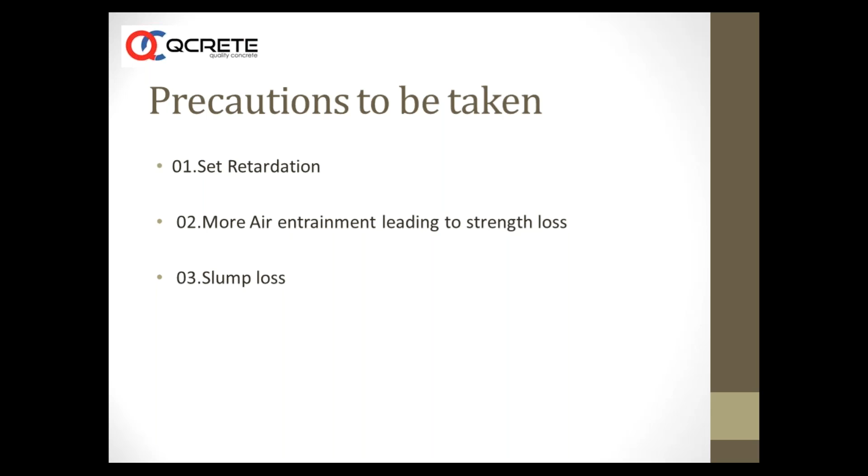We need to be careful when using two admixtures, because sometimes you have a PC admixture on plant, and sometimes you have another admixture, maybe SNF. PC and SNF are not compatible.

You should not mix a PC admixture or any admixture with a waterproofing admixture without doing a trial. There are some customers who will say, I want to add waterproofing admixture. If we just directly add it, you may end up in set retardation, as most of these waterproofing materials are basically based on lignosulfonate based admixture. They probably have an inbuilt retardation property and air entraining property.

So if we don't do trials and don't fix a proper dosage of both the regular superplasticizer that we are using in conjunction with what is supposed to be used as a waterproofing agent, we are going to end up in set retardation or air entrainment or strength loss or something like that. We also sometimes talk about heavy bleeding and segregation.

So we hear customers telling about heavy bleeding. Heavy bleeding and segregation can happen because of coarser particles, gap graded aggregates, a complete repulsion of admixture by cement particles - meaning cement particles repel water and admixture in a very big way. High amount of charges are deposited. High dosage also can cause heavy bleeding and segregation.

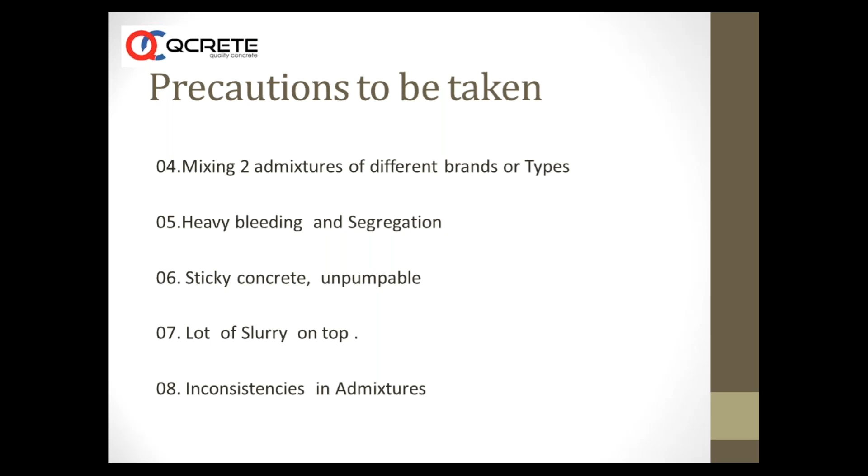We need to understand, as concrete technologists and civil engineers, what has gone wrong with the other ingredients. So when we are talking about usage of chemical admixture, as long as the properties - pH, specific gravity, solid content - everything is within range initially when we do the trials, and if the admixture company is giving similar solid content, similar pH, similar specific gravity, all as per the IS code within the limits of the manufacturer, then the changes we need to look for are outside the admixture, outside the admixture.

One of the most beautiful statements by Einstein: today, wherever we are sitting, this point will not come again in our life - not only for anybody, for the entire humanity - as the Earth is rotating at a mind-blowing speed of 30 kilometers per second. The Sun and galaxy, everything is shifting at very fast rates, and we will not be able to touch this point again in our life, actually.

So we should be curious about not only concrete, not only admixtures. We should be curious and open-minded to understand so many other things which are happening in this world. Especially as concrete technologists and civil engineers, we should learn the behavior of chemical admixtures, and when they are incorporated, how they behave and change the total concrete itself. We should develop this interest, and we should be curious to know more and more about chemical admixtures.